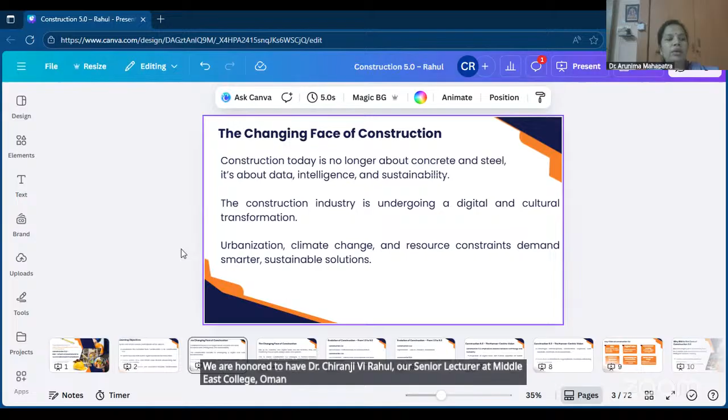We are honored to have Dr. Chiranjeevi Rahul, our senior lecturer at Middle East College, Oman, to speak on Construction 5.0, BIM driven innovation for a sustainable built environment. Sir, we warmly welcome you to the session. Before we start, I now invite our faculty colleague, Mrs. M. Himangeshwari, Assistant Professor, to formally introduce our eminent speaker to the audience. Over to you, ma'am.

Thank you, ma'am. Good evening, everyone. It gives me immense pleasure and pride to introduce our eminent guest and today's speaker, Dr. Chiranjeevi Rahul Rolakanti, distinguished academic and professional, my guru, mentor, and a true inspiration in the field of civil engineering. Dr. Rahul is serving as a senior lecturer in the Department of Civil and Mechanical Engineering at Middle East College, Muscat, Sultanate of Oman, since 2015.

He holds a PhD in civil engineering with master's degrees in construction technology and project management, and soil mechanics and foundation engineering. He also earned a postgraduate certificate in academic practice with distinction from Coventry University, UK. With over 13 years of rich academic experience and a year in the construction industry as a quantity surveyor, Dr. Rahul blends academic excellence with real world expertise. He is a chartered engineer recognized by the Institution of Engineers, a member of the Chartered Institute of Building, and a fellow of the Higher Education Academy, UK.

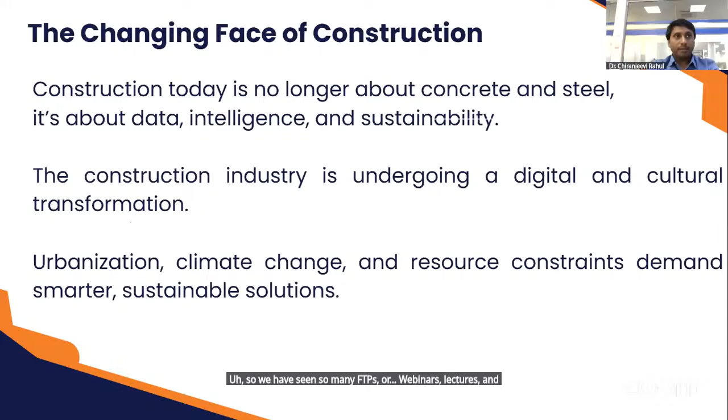We are all aware that the construction industry is undergoing a digital and cultural transformation. We have seen many FDPs, webinars, lectures, and construction people are more focused on urbanization, climate change, resource constraints, resource allocation, project management, and finding smarter and sustainable solutions. The changing face of construction continues such that the next era includes BIM, artificial intelligence, Internet of Things, robotics, and digital twins.

These are all no longer futuristic, they are already being implemented in various parts of the world. This integration of technology is redefining how we plan, design, build, and operate construction projects. That is why this topic is emerging, majorly focusing on human-centered technology, integrated as a model focusing on collaboration between humans and machines to achieve sustainability.

Here we look at the evolution of construction from 1.0 to 5.0. Construction 1.0 focused on manual labor and craftsmanship, with little mechanization. Construction 2.0 addressed what was lacking in 1.0, and mechanization began with heavy equipment and construction plants coming into practice. Construction 3.0 started industrialization, like prefabrication, mass construction, and integration of advanced construction methods and technologies. Maybe we were in that era.

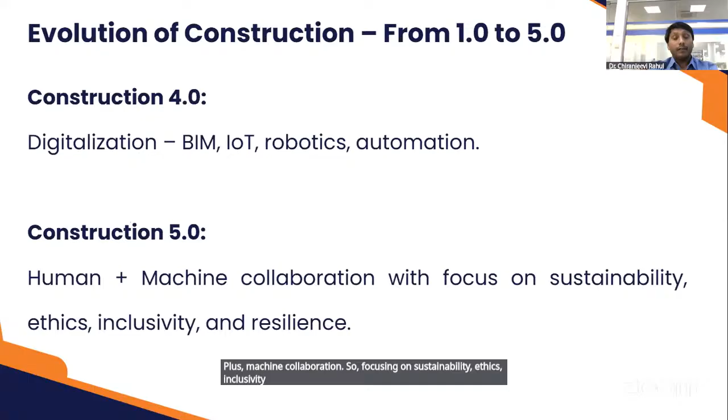Let us dig more into Construction 5.0. What is the human-centric vision and what does it emphasize? It's a balance between technology and humanity — technology should not overcome us, nor should we be negatively affected by it. It's integration between a human-centric approach, combining digital tools with human expertise for better outcomes. In simple terms, Construction 5.0 integrates digital tools with human-centric vision for better outcomes, with technology supporting and enforcing us to achieve better results.

This focuses on a sustainable, safe, and inclusive built environment, and majorly encourages interdisciplinary collaboration. Until now, civil engineers and architects were only collaborating, but now with BIM, software, IT people, and data scientists are all integrated. It's interdisciplinary collaboration where engineers, data scientists, architects, and environmentalists are included, because of the focus on sustainability.

This moves from automation to augmentation, with machines enhancing human decisions. Machines are not overcoming us — we cannot look at it that way.

So we can look in such a way that machines are enhancing our human decisions. Machines are supporting for better outcomes, giving some sustainable outcomes in construction projects. So I would like to say that these are the key pillars of construction 5.0.

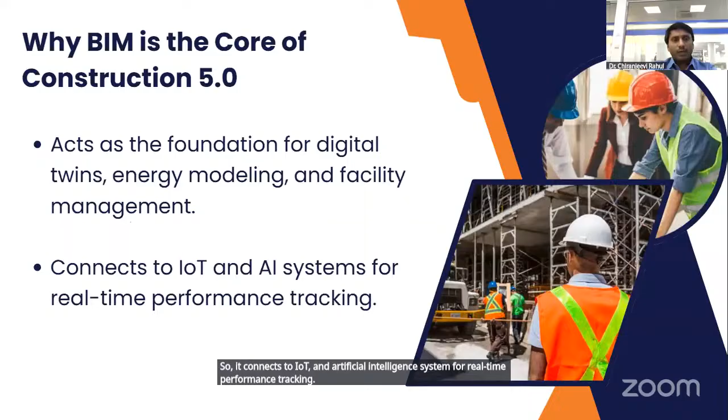It acts as a foundation for digital twins, which has energy modeling and facility management as well. It connects to IoT and artificial intelligence systems for real-time performance tracking. So this is why BIM is the core of construction.

So coming to BIM for sustainability, how it can go beyond design, how we can integrate BIM. First of all is material optimization. It's very important that optimization is the basic key of our project management techniques, where we need to properly plan, like we know all 5 M's: machines, machinery, materials, manpower, money, management.

All these 5 M's are all having the same goal of optimization. So it will help us for material optimization, which will identify low carbon materials or low carbon construction methods, using locally sourced materials, and it can also help us in life cycle assessment, like tracking embodied energy and carbon footprints.

And this is a major point of sustainability aspect as well. There are so many studies which mention that most of the waste coming from construction industry, in various forms, can be managed using virtual clash detection and lean scheduling. So before the project itself, most projects are having a visual idea of how it is going to happen, where it is going to happen, and they are also identifying risk management, or can also identify hazards.

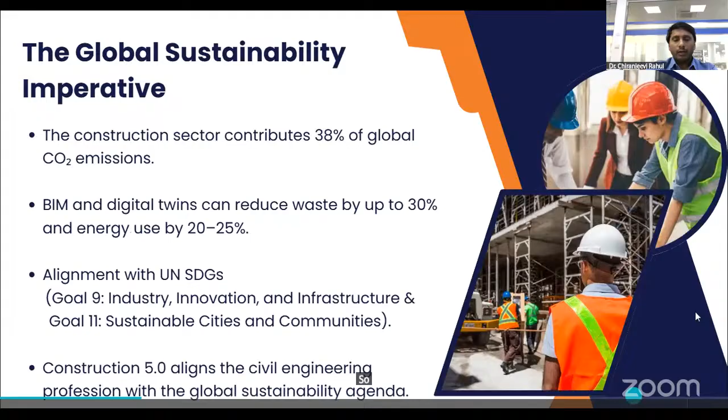So we are all working on the sustainability agenda. Even here in Oman, we have Oman Vision 2040. India also has Vision 2047. So all are focusing towards a sustainable approach.

This is a brief of what is Construction 5.0 and how BIM can be incorporated, and what are the advantages. Since this is a faculty development program, I'm not going to the basics like advantages, disadvantages, how it can be used. I would like to jump more into practical scenarios and explore some real-world BIM examples happening around the world with sustainable projects driven by Construction 5.0, including basics from principles to design to operations.

So here are some examples. I have gathered some projects. There might be so many, but I have taken 3 or 4 examples of global projects from UK, Singapore, and Australia. As I'm working here in Oman, I have also considered the GCC region - Saudi Arabia, UAE, and Qatar.

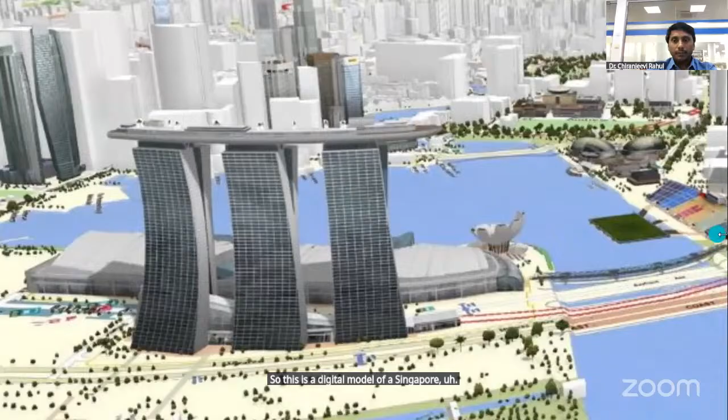So this is a digital twin model of Singapore. These are the models that they have created.

Coming to Sydney Metro, Australia - digital twin for operations. This project implemented BIM and IoT integration for real-time monitoring. These are all digitally linked to maintenance schedules through 7D BIM - this is 5D, 6D, and 7D facility management. We have gone through 7D BIM before, which is facility management. They are digitally linking all these maintenance schedules.

This helps track energy consumption and carbon performance as well. They have predictive analysis and forecasted maintenance needs, and have reduced downtime by 30%. This is a very major problem where clashes in schedules or issues in metro delay a lot of trains and transport, causing suffering for many people. So this has driven digital twins which make public transport infrastructure smarter and greener.

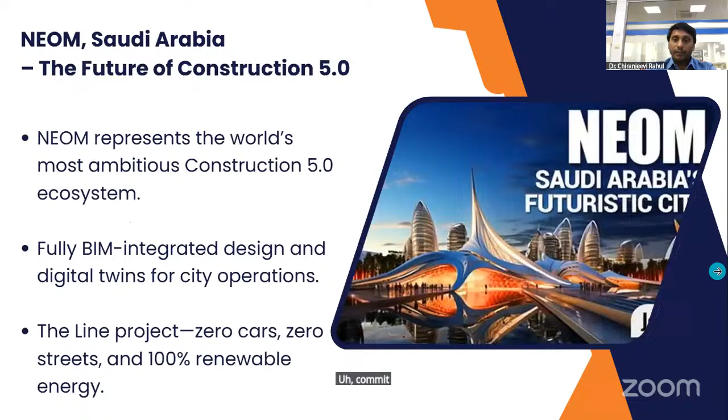They have developed this using all the technologies we were discussing. It's a fully BIM integrated design with digital twins for city operations - not only about designing, but from the basic design stages to operations and even maintenance. The Line project has zero cars, zero streets, and 100% renewable energy, which is why it's the future of construction. Achieving 100% renewable energy is an outstanding commitment for the future of construction in terms of sustainability.

They have incorporated AI, robotics, and modular construction, which helps reduce waste and human errors. You can see the focus on circular economy - this is one of the key points I mentioned. Materials are tracked for reuse using blockchain, which is why it became interdisciplinary. Blockchain comes into the picture, IT people come into the picture, data scientists come into the process - all enabling interdisciplinary actions.

So it defines construction 5.0, like technology and human coexisting sustainably. It's not only technology working, it's not only human - as we discussed, humans get support from technology, which enhances decisions. So this is a view of this NEOM project - NEOM into the future.

And the next example is Expo City Dubai. In the earlier days it was called Expo City, the Expo 2020 site, the place where it happened, but now it was transformed into Expo City Dubai, which is a sustainable smart city with a lot of scope for research. We can identify numerous technologies in this topic.

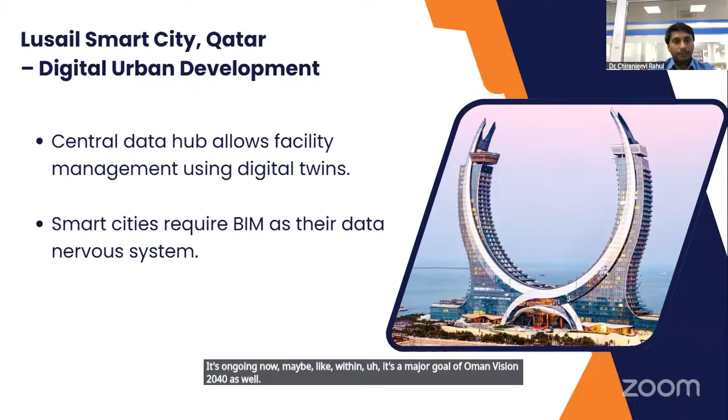This is what I was saying about the building designs, the building architecture. It's like one Corniche area, one special city, so Qatar looks different. When we see the normal city, it looks so authentic, like a typical GCC country area. But when you see this city, it's totally different - very smart, huge sky towers, skyscrapers, and different technologies. Every building has its unique architecture.

So what are the reflections? What are we going to take away from this? The first major thing is the vision-driven approach. Countries have a vision, governments have a vision, so they started linking it into national sustainability agendas, which has supported construction organizations to follow this approach.

The major problem here is that normal or private construction projects generally don't take the risk because this requires a lot of technology and skills, and we generally have what I can call starting trouble - we cannot directly implement something new. We require some time, we have to see some good examples. If some good examples have been set, then we try to follow them. So this lead should be taken from the national level, then it will slowly inculcate into construction projects.

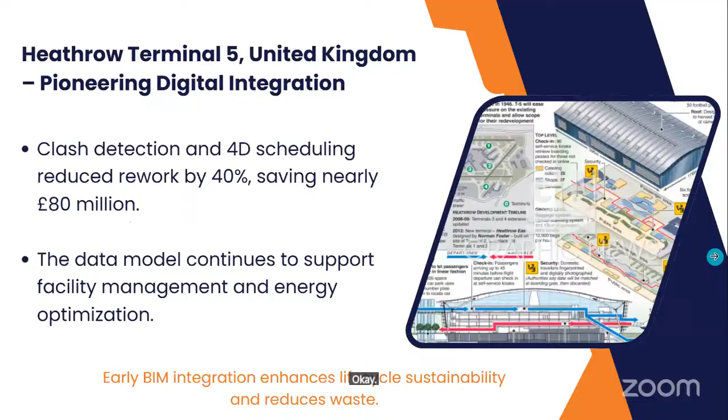So any other questions, please? I can also understand what is lagging and how I can take it further. I can focus on those points where you have queries, or you can share your experiences. Is there anyone who has already started working on BIM, or any industry people who have experience with BIM? Please share your experiences as well.

Rahul sir, we have the question and answer time at the end of the session. We can interact at that time, otherwise there is an interruption to your flow of explanation. Yes, sir, I understood, sir. Okay.

Coming to Indian case studies, how BIM enables sustainable development. One of the best examples is the Nagpur Metro Rail project, which is the first 5D BIM implementation - India's first fully 5D BIM managed metro project. They implemented 3D, which is mostly related to design, 4D related to time, and 5D related to cost. Previously we discussed 6D and 7D as well, which is facilities management.

This implementation of BIM reduced construction cost by 8% and time by 12%. This is the practical result of implementing BIM, which resulted in these savings, because a metro project might be a very huge project, and a cost reduction of 8% and time reduction of 12% is a very huge margin. Especially time, because we are facing so many issues with construction delays, and that can also be addressed.

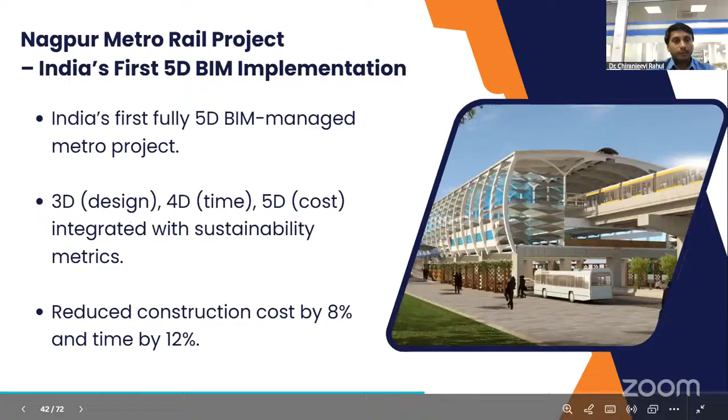The Nagpur Metro Rail project has BIM dashboards which help monitor material usage and CO2 emissions, enhancing transparency and sustainability in public infrastructure. These are the best examples of BIM implementation in India. This is a view of the 5D implementation in the Nagpur Metro Rail project.

So coming to this Amaravati Smart City, like I can see the disclaimer. Coming into the practical realities, we can talk about how they have started it and how they have designed it. So coming to this implementation of digital twin urban planning, the capital city project in Andhra Pradesh was planned entirely with BIM and GIS integration.

This has the advantage of simulating energy efficiency, and also the importance of water flow, conservation of water, and environmental comfort. So it has been designed as a zero carbon city, using BIM-led energy models. We might have heard the news that people from Singapore came and helped us design this project, because they are already ahead.

If you see the example of Singapore city, they started in 2015 itself. This BIM facilitates evidence-based decision making in urban planning. So this is one of the major parts, that urban planning has huge impact.

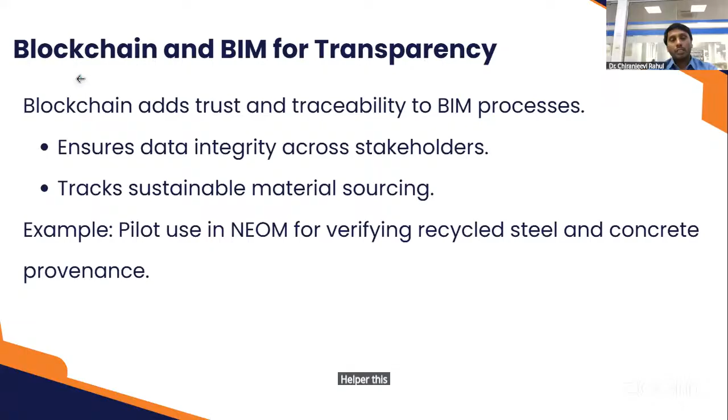As we discussed earlier, the pilot use of NEOM for verifying recycled steel and concrete provenance has helped this integration of blockchain and BIM for transparency. I have a flow chart, I'll show it later.

Integration of IoT with BIM. IoT is all about sensors, communication, signaling, or alerting, which monitors temperature, humidity, and occupancy. The sensors are directly connected to BIM, which enables dynamic energy adjustments.

Expo City Dubai uses 2,000 plus IoT devices linked to its BIM for real-time energy optimization. I have seen the Dubai Expo - not only for climatic or weathering actions, it has a lot of real-time energy optimization as well.

Coming to academia, research and industry integration - how we can incorporate this into our research.

So many of you might have already started doing research into it and gone through these different courses available. Faculty play a pivotal role in bridging digital theory and real world practice, because it starts from here.

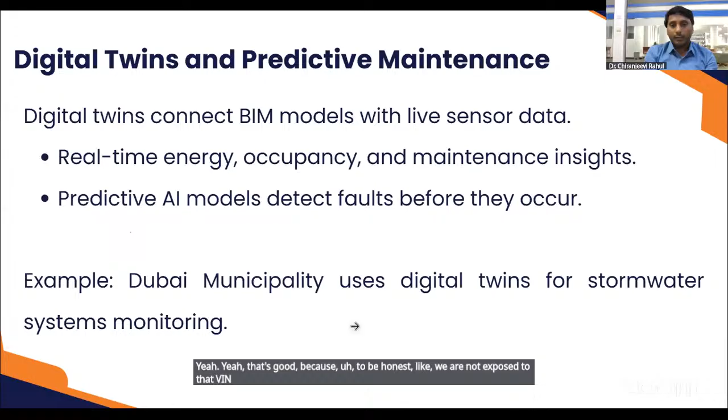In the previous two sessions, did you find any practical approaches or explanation, sir? Somewhat, even I have noted it down. That's good, because to be honest, we are not exposed to BIM integration since we are into academics, right? So I have not participated in any BIM integration.

But now the curriculum is based on implementing a BIM lab for graduate students, right? This is a nice takeaway for me as well, because next time I will go for an internship training for BIM integration, so I can come back with a practical example. As of now, I have no practical example where I have worked on it.

Even the session is too good, sir. Thank you so much for your genuine feedback. I really appreciate it, which helps me to grow as well. Thank you, sir.

Gautam sir, I have no idea about which private organizations, and I cannot mention them, because this is not the correct platform to recommend companies doing certificate courses. I don't want to take the credibility from them, sorry about that. When we are talking about a particular course, it should be approved by your colleges and all, I'm not sure about that.

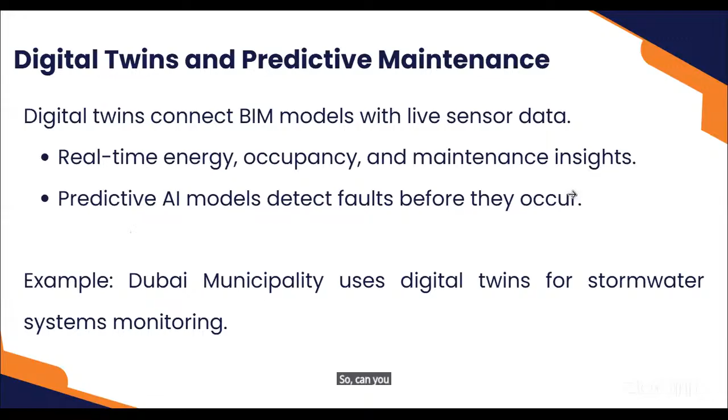Good evening, sir, yes sir. Sir, Giridhar here. Hi yes sir. Yes, Dr. Giridhar, yes. Thank you, sir. There are so many research scholars also here, so can you give any suggestions to them on global opportunities after completion of their research work, after being awarded? Exactly, so there are many opportunities now.

Like these are the research themes which you can see on the screen. I think I'm not sharing the screen, right? Sorry, it's already visible, okay fine. So you can see this digital twin development, especially you can consider heritage conservation.

We are all running behind the technology, concrete jungles, but one sensitive area is heritage conservation. Implementing these technologies without losing the heritage, especially in Oman, they are very much focused and concerned about their culture and heritage. Whatever development happens, it should not affect their culture and heritage. So countries especially focus on this, it's one of the important research areas. We're already working on construction waste reduction models, but how can you use artificial intelligence? BIM GIS might be a bit older version, so blockchain could be one of the interdisciplinary approaches to take. Maybe you can collaborate with a computer science faculty or management faculties, to see how they are incorporating them and how we can bring that into civil engineering.

Electronics engineering, electronics and communication engineering, and computer science engineering are our best peers where we can start working collaboratively. If you can publish some good papers, there is huge scope for research grants. Even we have the research council TRC in Oman, providing huge funds if you come up with construction 5.0, BIM, or artificial intelligence. So grants can be the next target, and even the government can also provide. International grants are also available for these things.

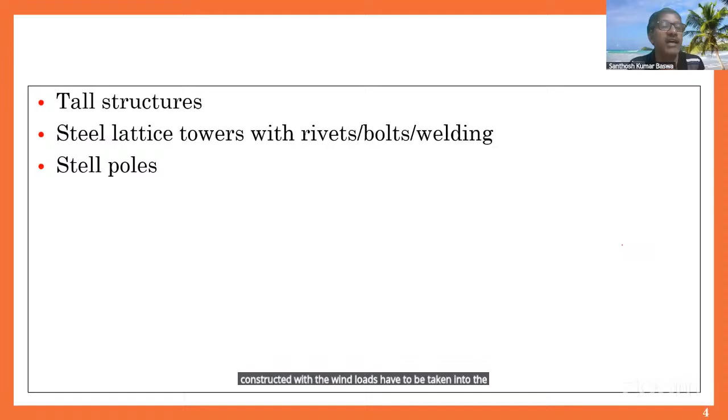So there are tall structures, and wind mainly has a resultant effect on tall structures - steel lattice structures with rivets, bolts, and welding, steel poles. These structures are constructed with wind loads taken into consideration. These are only flexible structures, not rigid structures. Even rigid structures, we take wind into consideration, but the inertia has a higher effect, so the wind effect is very, very less.

But for these tall structures, where there is the highest porosity or highest flexibility, these have to be considered for wind load on the structures. That is in the case of the working stress method, the limit state method, and the ultimate load method.

In France, that is the Eiffel Tower - the Eiffel Tower means cantilever action when compared to column action. The cantilever action is in the working stress method. We have shown that when the wind stress is greater, up to 33 and 1/3 percent, it is taken as wind structures, and it has to increase for wind structures.

In case you provide column structures - column is the vertical load, but wind is horizontal. When vertical load comes together with horizontal load from wind, both the wind load and vertical and horizontal load up to 33% - there is no necessity of any extra safety, but up to that we have to consider cantilever structures and column structures.

That is why in the previous working stress method we increased by 33% for wind loads and 25% for rivets. But in the limit state method, the philosophy already considers probabilistic design, so that was avoided. For column structures, G means gravity and W is the wind loads. Total wind loads plus gravity loads divided by gravity loads should be less than or equal to 1.33, that is 4/3.

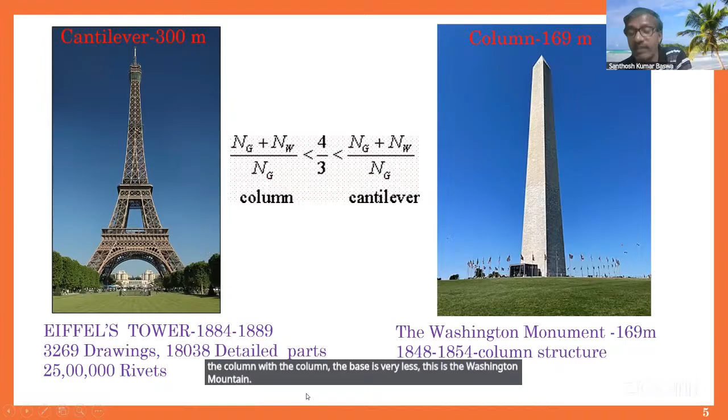This is column with column, the base is very less. This is the Washington Monument, 1848 to 1854, a column structure, 169 meters in height.

From 1960 to 2011, so many tall skyscrapers, from 634 meters to 329 meters, have been constructed. As research has gone on, different methodologies and materials have been used in construction, so recent research has been pronounced for wind engineering, adapted over the last decade or the last 50 years.

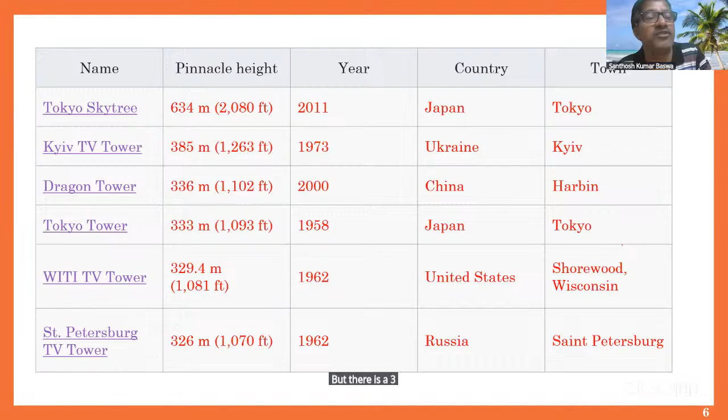So in history, there are many wind failures that have been observed, which we have taken from books and the internet. The first was in 1836, the Brighton Chain Pier Bridge failure, the first engineering failure observed in history, and similarly the Tay Bridge failure was shown as a wind failure. These are wind failures in ancient history, even in 1836 and 1879.

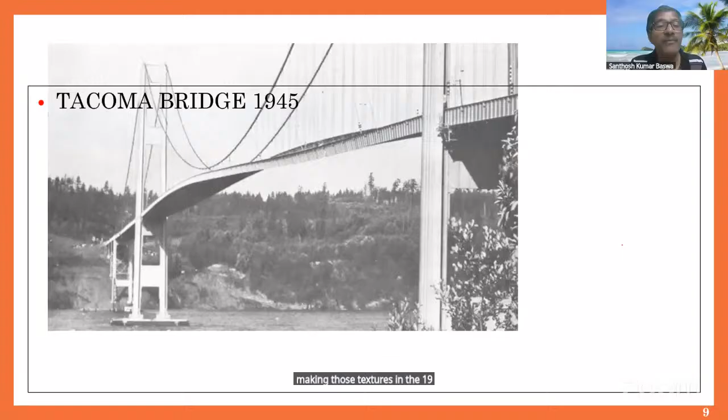This is the famous Tacoma Bridge. This is fluttering, 1945, one example of fluttering. This is the wake of the wind, and it collapsed due to the waking of the structure in 1945. So this is the interference effect.

Interference effect means the interference effect, and these are silos and thermal engineering structures. These large structures collapsed due to the interference effect, from the front end to the rear end, creating the highest wake. Wakes form, and these collapsed due to the resonance effect and the interference effect. That is why, in 1965, these collapsed.

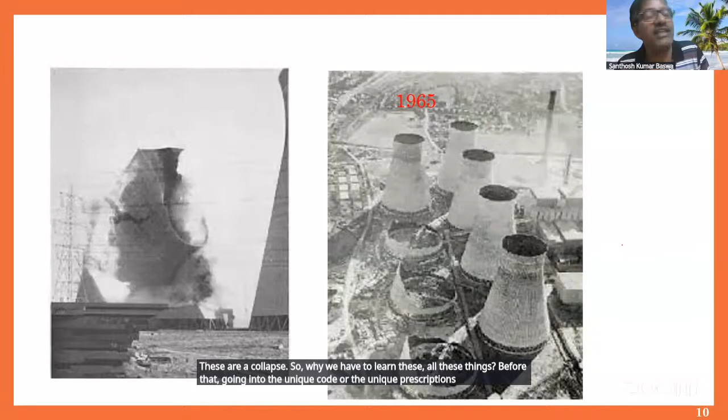So why do we have to learn all these things before going into the wind code or any prescription? Just as a doctor asks you what your problem is and why you have come, before going into our 875 code we have to look at past failures. Thus past failures inform future sustainability.

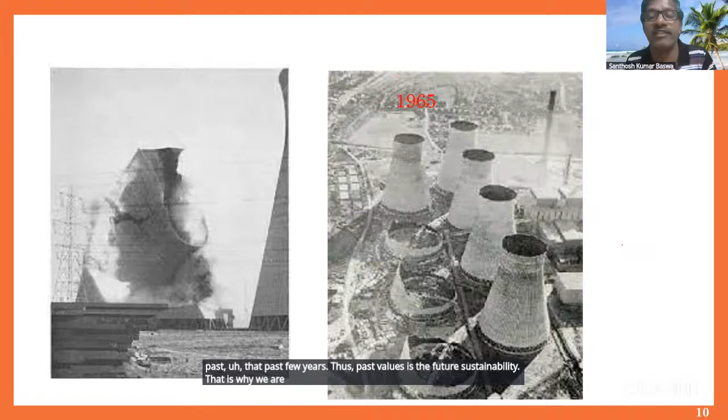That is why we are putting all these things into this lecture.

In India, the broad design aspects are of two types: force-based design and displacement-based design. Wind load is force-based design. Dead load, live load, snow load, and blast loads are also force-based, but earthquake load is displacement-based. This is inertia, and earthquake load acts at the bottom, the foundation of the structure, while wind load acts on the total structure from base to top. The design philosophy is different from one to another. That is why we are taking wind load as the force-based design.

The atmospheric boundary layer means the atmosphere up to which thermal equilibrium has to be taken into consideration, the height up to where wind force is taken into consideration. In this atmospheric boundary layer, there are variations of wind: mean wind forces, waves, and turbulences.

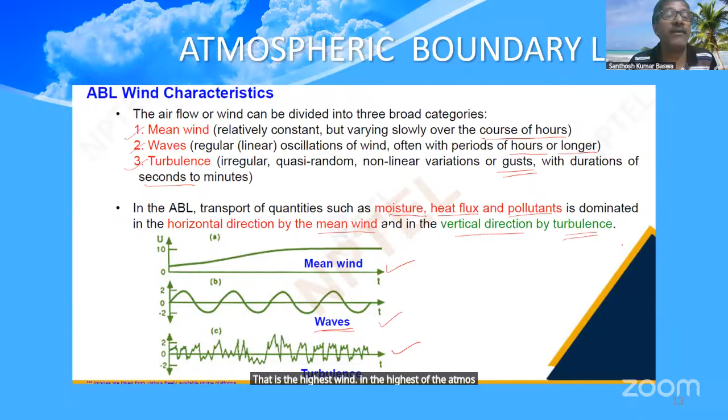The wind has to be measured with an anemometer, specifically a cup anemometer, which rotates and gives a rotating pulse reading. This anemometer measures from 1 hour to 1 hour, and also 3 hours to 3 hours. These readings show peaks, including single peaks of only 1 second.

Wind has been defined from local height up to 10 to 30 meters above ground level. Up to 10 meters, for a 3-storied building, there is no necessity of taking wind force into consideration as per IS 875 Part 3 code.

This shows the average wind speed taking into account the Beaufort code, representing time variations with respect to velocity. These variations occur because when designing structures, especially tall structures, many factors and probabilities must be taken into consideration. That is why time, velocity, frequency, and average velocity must all be considered in structural design.

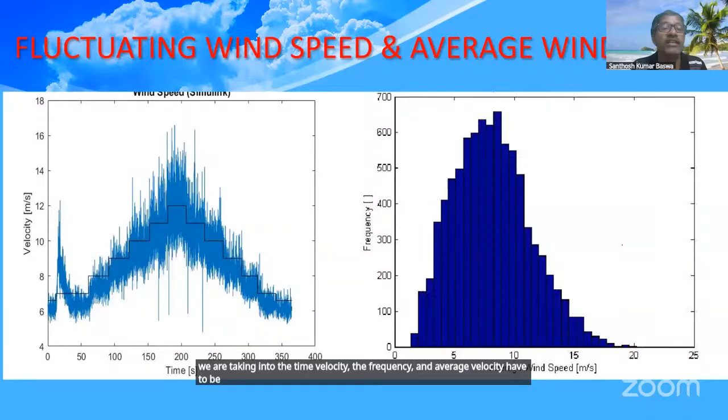At the same time, there is the velocity factor of the free stream boundary layer, from the ground level up to where maximum velocity reaches the free stream of wind, the boundary layer. The horizontal component of wind is what is taken into consideration for wind force. Although wind can move in vertical or horizontal directions, only the horizontal direction is considered for our structures.

Before that, there are two types of atmospheric activity in India. One is the rotating wind, the second is the non-rotating wind. Rotating ones we have already seen in the cyclones. These are the cyclones where there are the highest pressure variations. We are taking into consideration the rotation types.

In the non-rotating winds, these are small and calm, at neutral equilibrium of the atmosphere. The atmospheric boundary layer can be inversion, dynamic inversion, or neutral. We are taking the neutral atmospheric boundary layer. Because it's neutral, we are not considering thermal effects, only the mechanical consideration, the force and effects.

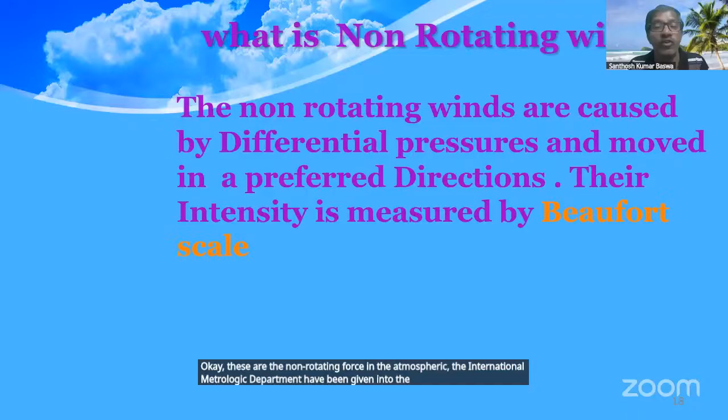Differential pressure there - these are the non-rotating forces in the atmosphere. The International Meteorological Department has given some consideration to the Beaufort scale. What is the Beaufort scale? Calm is 2 kmph, 2 kilometers per hour.

The hurricane is 117 kilometers per hour. Moderate gales are 50 to 61 kilometers per hour, causing inconvenience when walking, and strong gales are 75 to 85, and 89 to 102 kilometers per hour, with small trees uprooted. This is the Beaufort scale, internationally adopted for non-rotating wind speeds.

When there are rotating wind speeds, like on the east coast region and west coast region, or in America, Australia, the Indian Ocean, the Bay of Bengal, or Arabian Sea, or the Atlantic, or Pacific, whatever it may be, there are tropical cyclones near the equator, extending up to 20 to 30 degrees latitude where we face tropical cyclones.

This type of cyclone has been devastating, causing so much financial loss to the government over the last decades, and in history also we have faced so much economic disaster. But the deaths are considerably reduced when compared to economic losses. Economic losses have also gradually reduced because of the advancement of wind engineering.

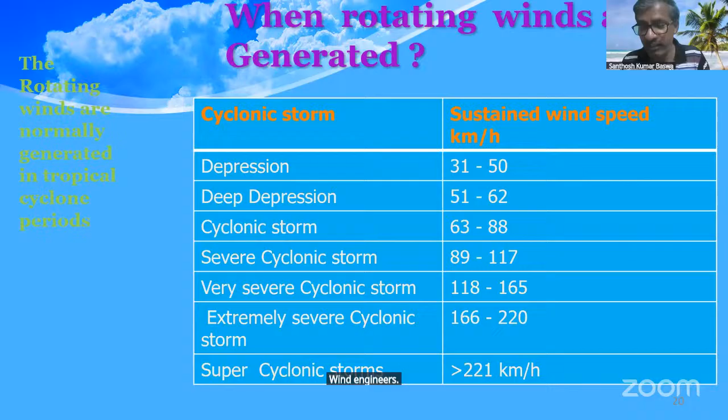So what is the spectrum? Spectrum is a unique combination of so many frequencies. That is the wind spectrum. Wind spectrum means wind frequencies. So many wind frequencies have been provided on one logarithmic scale.

Even when studying soil mechanics or structural engineering, we provide a semi-log graph, for calculations and classification of soils from clay and silt to boulders and other things - these are 40mm to 0.2-2mm. These various large variations are provided into one diagram, which is why we use the logarithmic diagram.

What is the spectral gap? Spectral gap means there are no variations within the 1 hour period. So we don't take into consideration weathering, but we consider the wind for our mechanical purpose only.

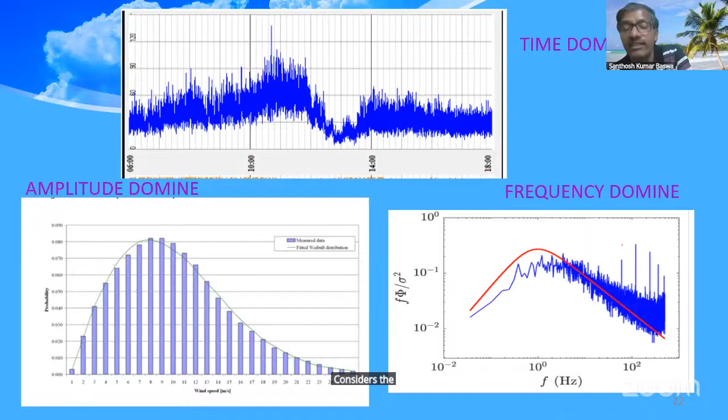So the U(z,t). Z is the difference of the height of the structure or the height under consideration. T is the variations of time. U(z) is the mean wind speed, and U'(z,t) is the turbulence, that is the fluctuation wind speed. Both fluctuation wind speed and mean wind speed are considered as the total horizontal wind speed for design of all structures, tall or even small structures beyond 10 meters.

So what is the bluff body? There are two types. When we study in the theory of elasticity - plates, shells, bodies and other theorems - the bluff body is any body having three-dimensional shape. The plate is any body which has two dimensions less thickness, but our structures are bluff bodies. Thickness means three dimensionals, that is X, Y, Z.

The wind has direction - wind is passing from one area to another, or the wind is stucking on any portion of the body. The wind pressure acts normal to the surface. When it acts towards the surface, it is the positive surface. When it is the negative surface, the wakes have formed on the other side - that is taken as the negative surface. But due to these bluff bodies and the viscosity of the body, the pressure distribution is not uniform.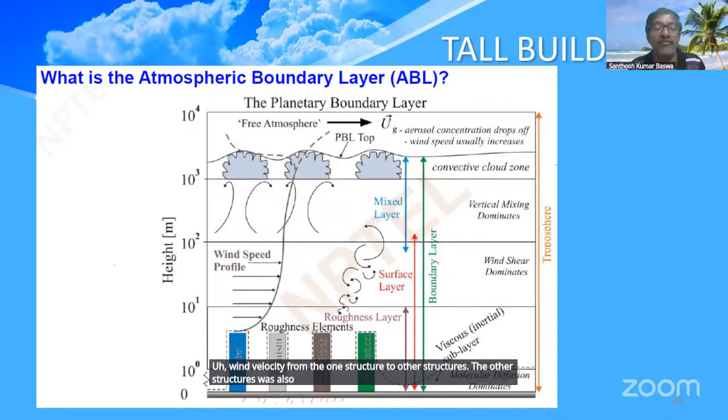So bluff body means that is the body where there is the three-dimensional effect, mainly at the edges. The edges are the sharp corners where the stagnation point is.

The stagnation wind pressure has been transferred, and the separation has occurred due to the stagnation of the wind pressure because of the velocity, the kinematic velocity, and the transfer to the stagnation point where the highest wind pressure, the kinetic V square by 2G, has been converted into the pressure head. The pressure head has gone into the stagnation.

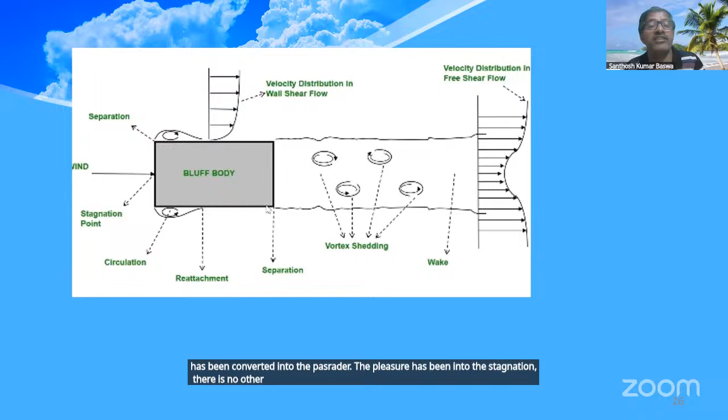There is no other direction to flow, that is why the direction of the flow was transferred to other directions. Where there is the highest direction, vacuum was created. The vacuum is transferred to the separation of the wind layer, that is the boundary layer.

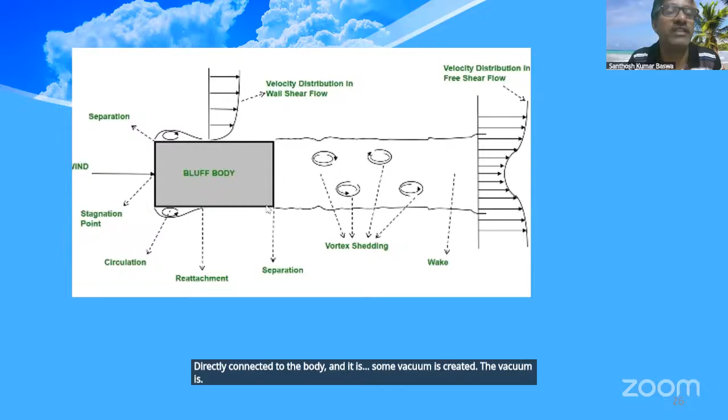Wind from the edges, because of the sharp edges, the wind was not directly connected to the body, and some vacuum is created. The vacuum is considered as the wakes. The wakes is negative energy.

The negative energy means that is a suction. The suction means the body was pulling to that side only, because of this is the shear layers.

Because we are taking into the mechanical effects, there is no thermal effects. We are taking the fluids as having only shear forces. Like in soil mechanics, we consider shear forces, and in fluids also we are taking into consideration of the shear forces.

So before that, going into the Indian context, in 1957 the whole code was provided for dead load, live load, wind load, and earthquake loads. In 56-57 is the first IS 875 code. In the first revision, 1964, earthquake code was deleted, and only dead load, live load, and wind load, these three, were considered by 1964.

In 1987, these were divided into part 1, part 3, part 4, part 5, into the parts, and the part 3 is the wind loads.

In the recent revision, 2015, the wind load has had some changes taken, and in 2016 and 2024 some basic wind speeds have already been changed from the 2015 version to the amendment version with the adoption of the National Building Code 2016.

In the structural design of the National Building Code, the basic wind speed map was already revised. The revised wind map was considered in the IS 875 Part 3 for wind loads for structural engineers.

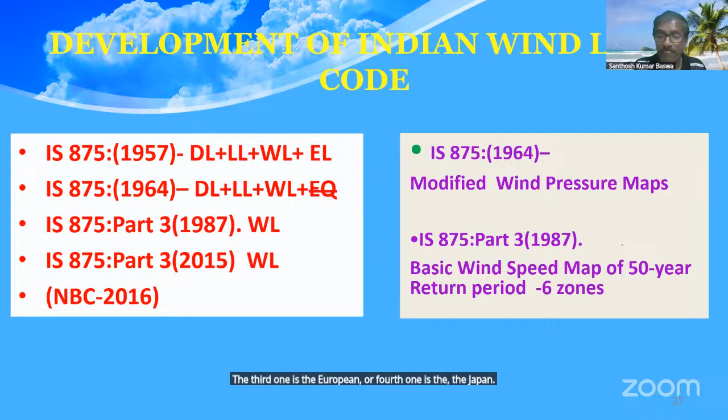So the title is the design loads other than the earthquake loads for building structures. This is the title of the wind code.

The title has been changed from 1964 to 2015, the 875 2015, or 1987, design loads. These are the design loads given for the minimum prescriptive loads to be adopted for the design of any structure. These are the minimum loads, but you have to provide more loads; these are the minimum consideration loads for designing any structure.

So when we are taking into consideration the wind loads of structures, there are two types of design methodologies. One is the static analysis, the second one is the dynamic analysis. Static analysis means up to low-rise buildings, we take into consideration the static analysis.

The static analysis is for roof structures, steel structures, and up to only small low-rise buildings up to 10 meters height or 15 meters height, we take into consideration the static analysis.

The dynamic analysis means we have to take into consideration the gust factor analysis because of the random response. In the code, in this analysis, we are taking into consideration two types.

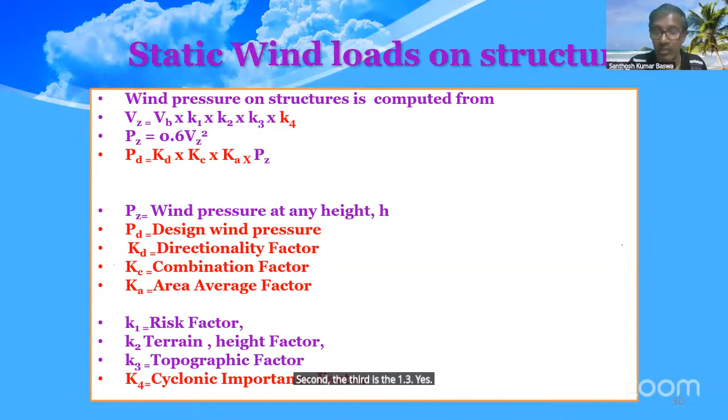Before that, there are 6 wind zones considered for basic wind speeds ranging from 33 to 55 meters per second. We are in zone 5 with 50 meters per second in the east coastal region, the second is 33 meters per second, and the highest is 55 meters per second corresponding to 198 kmph, which is in the Kashmir zone and Arunachal Pradesh zone.

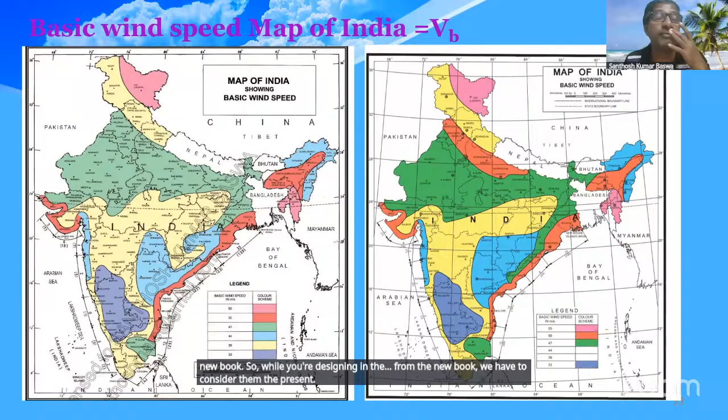So when designing from the new book, we have to consider the present design wind speed, not the previous wind speed. So this is from Lucknow, UP, and this is Delhi. Delhi 4th to 5th, that is 47 to 50. These are all 47 made. Existing basic wind speed is 47, and the revised basic wind speed is considered as 50 wind speed.

Because of Delhi, Punjab, UP, Chandigarh, Manipur, Jharkhand, Madhya Pradesh, Uttarakhand - they are all north states. North states have been changed from 47 to 50, and even some stations have been reduced from 47 to 39, that is Jharkhand, MP, Uttarakhand. Because of the availability of data, IS 875 has been reduced from 47 to 39. But if it is reduced, there is no problem.

But if it is increased, there is a problem of two types. One is existing structures, the second is new structures. First of all, we have to check the stability of the existing structure from 47 to 50 meters per second in Delhi or Lucknow. And in case of future structures, we have to adopt 50 meters per second as the basic wind speed. That is why we have to take it into the new code.

So earlier, the classification of structures, K1 is the risk factor, meaning the probability of non-exceedance of the given wind speed. The design wind speed is generally taken as 50 years. And at the same time, the general structure's design life is 50. It is taken 50 by 50 equal to 1.0. In case of 5 year temporary sheds or boundary walls, they are taken as 0.67, that is the 5 years of design life period.

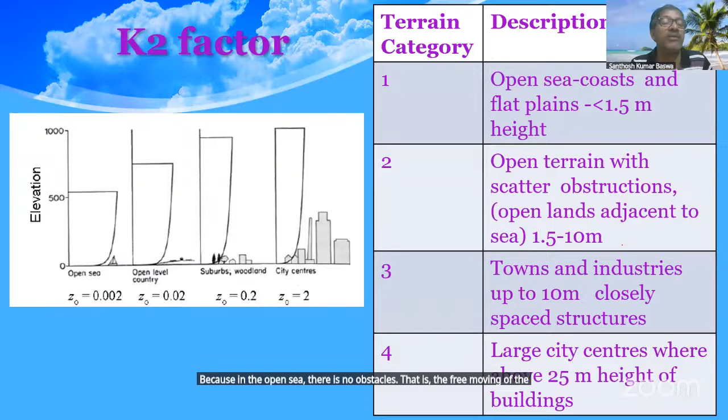It is terrain category 4. That is why the gradient height is very high, about 1000 meters. In case of open sea, the highest variation is at 500 meters, because in the open sea there are no obstacles, so the air moves freely. So this is the reverse of the diagram.

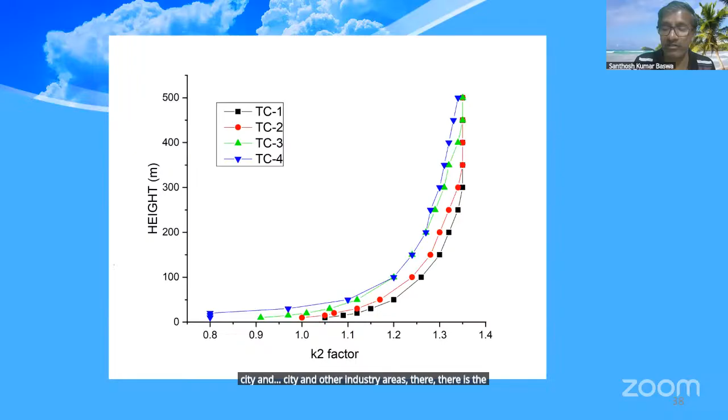1 is the lowest of the highest variations. For TC 1, the black line shows the highest variations, while 4 is the lowest. This is because the gradient height is low for open sea, but very high for category 4, in cities and industrial areas, where the highest buildings are considered. This is the variation of terrain 1, 2, 3, 4.

This is the table showing how the variation is 1.05 to 1.35. Even though it's only 5% or 35%, the internal forces change by a much higher percentage. These are the input parameters, while the output parameters are the bending moments, torsional moments, shear forces and other things. There are the highest variations because even a 2% change affects the stability of the structures.

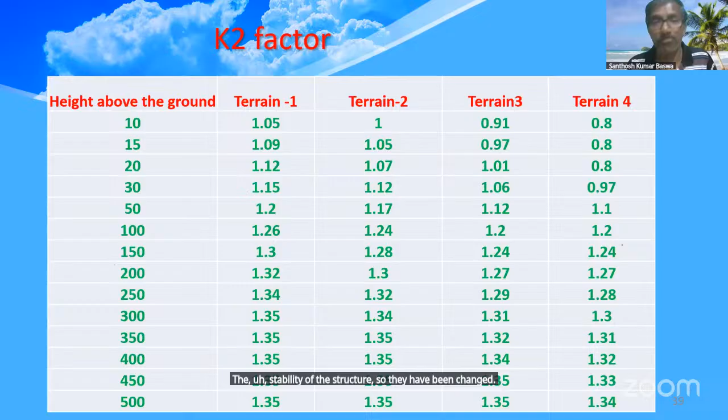So we are already taking up to 3 degrees. There is a hill, and before the hill or at the top of the hill, there are variations. It varies much because of the stagnation points. This is the stagnation point, otherwise there is the highest change of velocity.

Why are we considering K3, not for buildings, but for transmission lines? Kindly see, this is for transmission lines. This is K4, K3, the topography factor, which is highly influenced because on the highest land and the lowest land, the forces are different; one is highest, the other is lowest. The highest one creates uplift pressure.

The total structure was uplifted and collapsed, while the structure on the lowest point remained simply stable. That is why we consider the K3 factor for usage in transmission lines.

So this is recently adopted, and it will be considered only for the sake of Andhra Pradesh. There have been so many cyclones hitting Andhra Pradesh from 1960 to 2014, even in 2025, including the Montha cyclone. But we are not considering the cyclone economic effects. Every year we face one, two or three cyclones, since we are in the east coastal region.

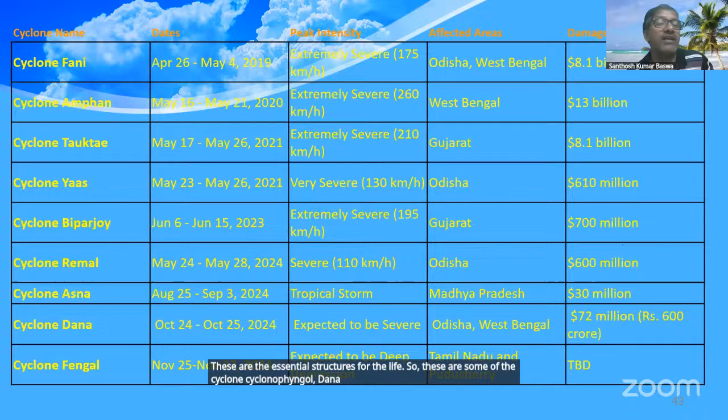So these are some of the cyclones - Fani, Fengal, Dana, Remal, Biparjoy, Amphan. These caused so much damage due to the cyclones. 8.1 billion to 72 million to 30 million - these are in Orissa, Gujarat, West Bengal, Tamil Nadu, Puducherry, and Andhra Pradesh. That is why the cyclonic factors have been recently considered from the 2015 code.

This damage in the affected areas - even in Andhra Pradesh, it is some places in the Krishna and Godavari districts, and in Orissa, mid-Orissa, and Calcutta. The third one is Madras. Madras state, and other neighboring districts, was damaged every year.

So in the case of design, the design philosophy has been given in the IS 875 code. Simply, the design considers the building as a whole. Second is individual elements, that is roofs or walls - because of industrial roofs, these are gable roofs, A-type roofs, or lean-to roofs. The third one is cladding units including glazing and fixtures.

Fixtures have the highest localized pressurized areas, that is why we consider fixtures as the highest. When considering roofs or cladding, we take the basic CPE and CPI, that is the pressure coefficient. But in the case of fixtures, the localized pressure coefficient is considered for the fixtures.

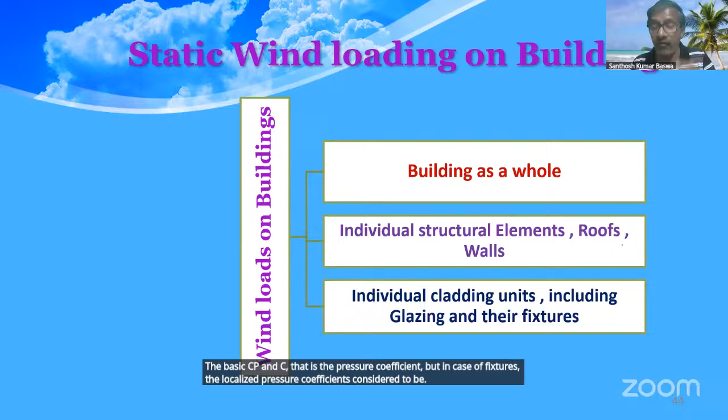This applies only to inclined roofs, that is A-type roofs, lean-to roofs, or single type roofs or mono slopes. For these roofs, CPE minus CPI means the external wind pressure based on the geometry of the structure.

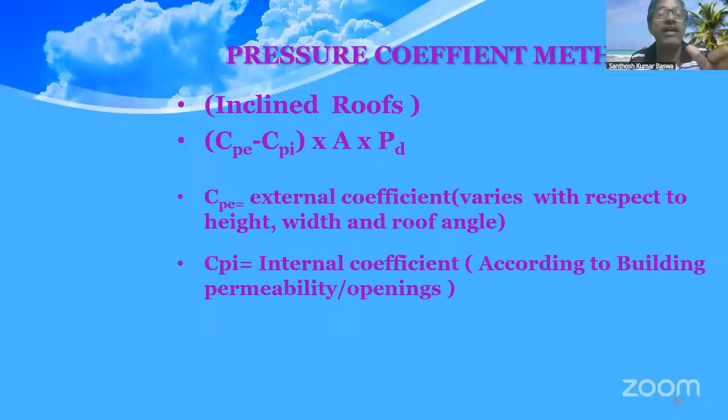CPI means internal pressure based on the permeability or opening of the structure. Opening means the total area enclosed into the walls or facades. The amount of opening means the amount of doors, fixtures, windows - these are considered for determining the difference between external and internal coefficients, so that we know how much force acts on the structure.

So this is the A-type roof truss. How does the incidental wind profile work - the left side shows the wind profile, how wind acts on the structures. The first point is the stagnation point, the second is the separation point, then reattachment, and wakes are formed on the leeward side. This is the frontward side, this is the windward side, this is the leeward side, that is the reattachment - how the separations are taken into consideration.

These are the uplift pressures or internal suctional pressures. The pressure acts towards the top, that is why we take into consideration these CPI internal suction forces towards the top.

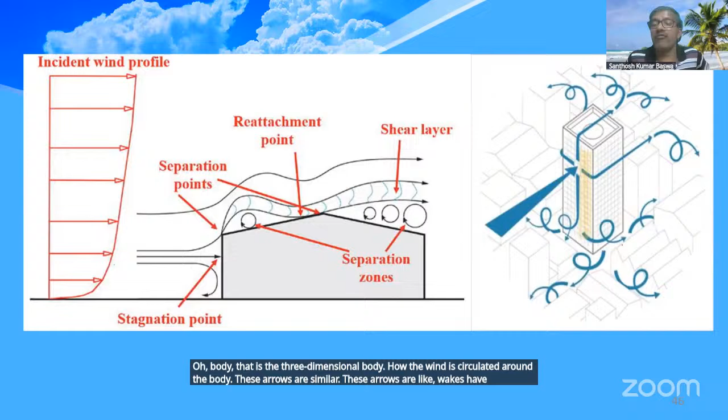The right side diagram shows how wind acts on a three-dimensional body - how the wind circulates around the body. These arrows are similar, like wakes. Wakes have been formed due to the stagnation point, turning toward the top, sides, and bottom. Because of these circulations, nearby structures are also influenced by wind forces on tall structures.

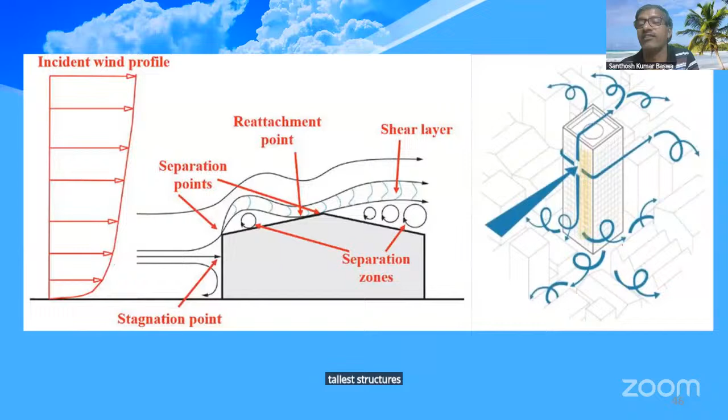If two structures are of equal height, there is no problem. But if one structure is tall and the other is somewhat smaller in comparison, the small structure also experiences effects from the tallest structure. These are the wakes and other interference effects - wind effects have been dominated for the structure behind as well.

This is why our question is, even when wind is acting from the left side to the right side, this is the pressure action, which has been transferred to the right. But as per model studies and wind tunnel studies, even though pressure is acting, the suction is more dominant compared to the pressure action.

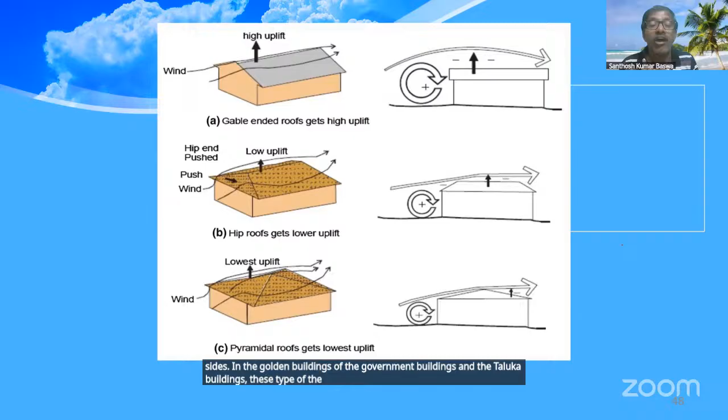This is both sides, that is the four sides, the slopes are formed on four sides. In the olden buildings of government buildings and taluka buildings, these types of pyramidal roofs have occurred in the older construction.

But in our present scenario, we have flat roofs and flat slabs. There is no problem of wind loads up to 3 meters for 3-story buildings. But in case of villages or isolated places, we provide this type of four unit slopes on all sides towards the ridges, pyramidal slopes, so that we have less wind damage compared to the other two types of roofs.

So this is the left side where the wind has occurred. This is why there is positive wind pressure on the windward wall, and this is the suction pressure. These are the internal positive pressures acting along with external forces.

These are the suctions showing how the internal wind pressure has been transferred to the highest wind pressure. Even though these arrows point towards the roof end, the outer side is also giving suction. That is why we get the highest wind force, which is on the eastward side, the highest wind force compared to the other ridges or other sides.

In this area, the height of the building, height by 2, height by width - the height of the building by width of the building is considered from three criteria.

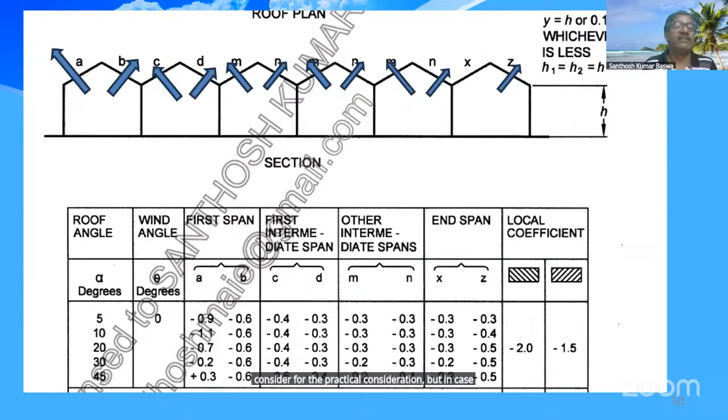In case of A and B, these show the highest variations at the starting position. The remaining are constant. At Z, it's somewhat higher than the inner one because there is no other structure on the right side of the structure. These are the code provisions.

So this is the wind. This shows the variations of wind pressure when the wind acts from left to right. In left to right, the variations of wind pressure are shown in this direction. In all three directions, the wind pressure is transferred.

That is why we take the wind load from height Z in any direction - the leeward direction, sideward direction, or windward direction - with reference to wind tunnel testing.

The CP pressure, external wind pressures, have been taken as negative values only. Kindly see it - these are all suction forces, and reattachment was not taken into account for the forces.

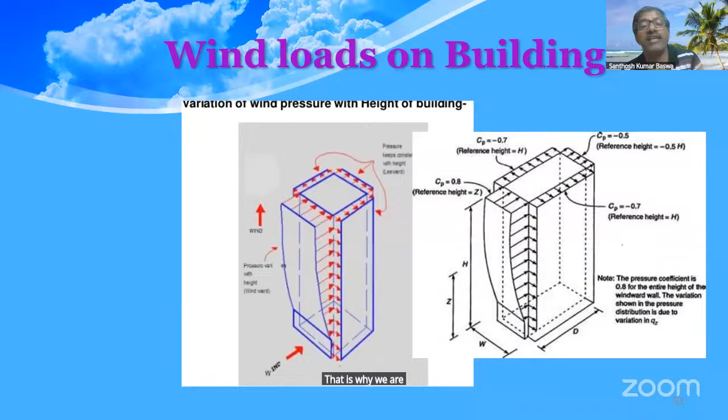That is why we take constants of 0.7, 0.5 and 0.7. The sides are 0.7, the rear side is 0.5. These are suction forces, which is why we consider oscillations from the windward side to the leeward side.

In case of individual frames or members of buildings, walls, hoardings, or anything similar, we only consider the force coefficient, CF, which is also a type of force coefficient.

Previously, CPE minus CPI represented the external coefficient minus the internal coefficient due to permeability. But individual members have no such permeability.

For these structures we consider force coefficients, generally used for buildings or walls. The third category is hoardings.

In case of walls or hoardings, the CD, the drag coefficient, depends on the height of the structure and the width of the structure. The width-to-height ratio may be 1.5, 5, 10, or infinity, giving variations of CD from about 1.1 to 1.6.

In industrial areas and cities, hoardings or signboards are prominently used for displaying advertisements. The correct methodology for this has not been specified in the code, but the design considerations aim to avoid undue variations in wind loads.

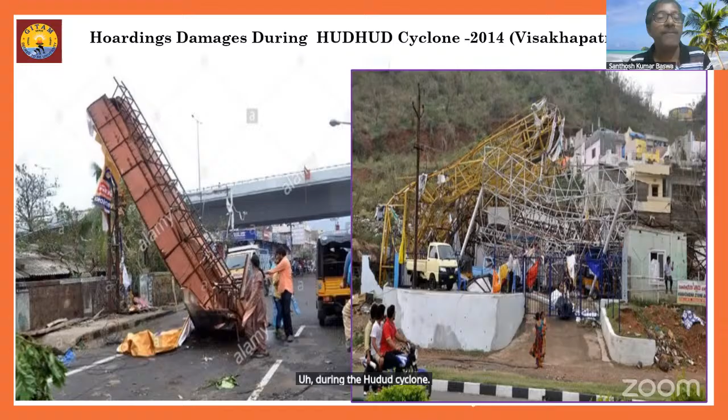This shows hoarding damages during Cyclone Hudhud in 2014. This is Visakhapatnam, and these are also from Visakhapatnam, showing hoarding damages during the Hudhud cyclone, including hoardings and display boards.

For water tanks, petroleum tanks, hoardings, and boundary walls - for water tanks we take a factor of 1.3. The code has not specified water tanks or petroleum tanks, but their hazard is very high compared to normal structures, which is why we take 1.3 for water tanks and petroleum tanks.

In case of hoardings, the design is not specified in the code, but because of the high damage caused in city areas leading to human loss or economic losses, these should be considered as industrial structures or post-cyclonic important structures - we consider them as post-cyclonic structures.

In case of boundary walls less than 3 meters, we do not take into consideration the 5 year return period.

This is considered as the 50 years design life. In case of boundary walls or retaining walls more than 3 meters, these retaining walls should be considered as post-cyclonic important structures.

There is also a factor of 1.3 for the cyclonic impact, considered to represent the loss of human life and structural safety. This cyclonic factor was introduced in IS 875 Part 3, 2015.

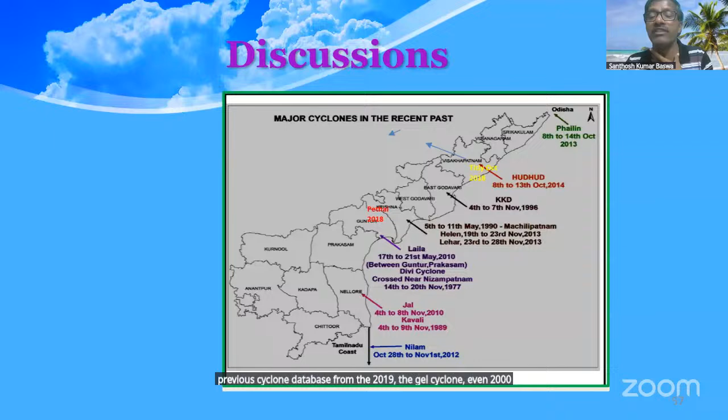This shows 1 in 3, 1 in 4, and 1 in 5, the three types of roof slopes. Standard slopes were considered in the design of steel structures, that is 10 degrees to 11 degrees. That is why we take 20 degrees, and above 20 degrees up to 30 degrees.

There is some positive pressure, but we are not considering the positive pressure, only the suction pressure.

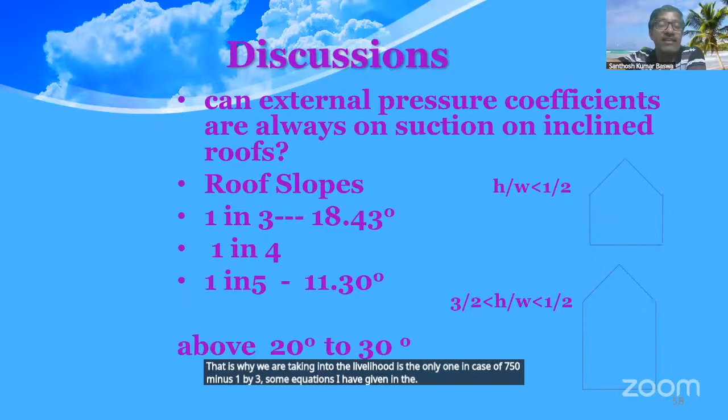So in case of the gust factor method, up to this level we are talking about only the static method of design consideration. In case of the gust factor method, it depends on the height of the structure.

The code has given low-rise buildings as less than 20 meters, and 20 meters to 50 meters, with greater than 50 meters being high-rise buildings. So 20 to 50 meters would be medium-level buildings, but this medium-level category was not specified in IS 875, only above 50 meters as high-rise buildings.

These are not only buildings but also telecommunication towers, transmission line towers, steel monopole towers, or street light towers - any tower greater than 10 meters is considered a high-rise structure. Oscillations of these structures have been predominantly considered in their design.

So this is about wind direction. When wind acts on any body, there are three types of forces: one is along-wind, another is crosswind, and the third is torsion. The crosswind and along-wind are in the same plane.

The along-wind is the drag force, the crosswind is the lift force. The lift and drag forces are in the same plane, not like in the case of aerofoils, where the drag force is horizontal and the lift force is vertical.

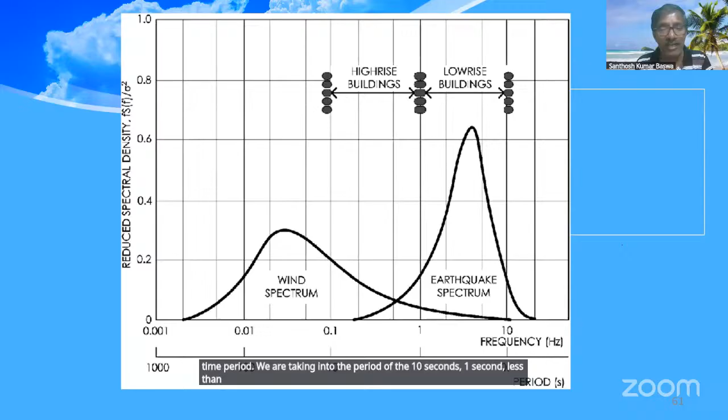This shows the variation of reduced spectral density for both wind spectrum and earthquake spectrum. The earthquake spectrum is in terms of frequency, the wind spectrum is in terms of time period. We take a period of 10 seconds, 1 second, less than 1 second - wind oscillation is considered from 3 seconds.

What do we take as the basic wind speed? This is the average wind speed over a 3 second period. But in case of earthquake, it is 0.6 seconds, or 0.1 second, corresponding to 1 hertz, 5 hertz, 6 hertz, or 10 hertz. There is a response spectrum factor given at 0.1, 0.2, or 0.6 seconds.

That corresponds to the highest frequencies. Earthquake frequency is the highest, while wind frequency is comparatively low. That is why we take into account the time period in seconds for wind.

The earthquake is in the hertz. That is the basic difference between the earthquake spectrum and the wind spectrum.

In case of the gust factor method, there is a height greater than 50 meters. There are variations of height, variations in the consideration of Z, variations of the level at which we consider forces and moments.

The second is frequency variations, which are the gustiness variations - the highest variations of the spectrum with reference to the resonance factor of the natural frequency of the building and the frequency of the wind. Both are considered for calculating the gust factor G value.

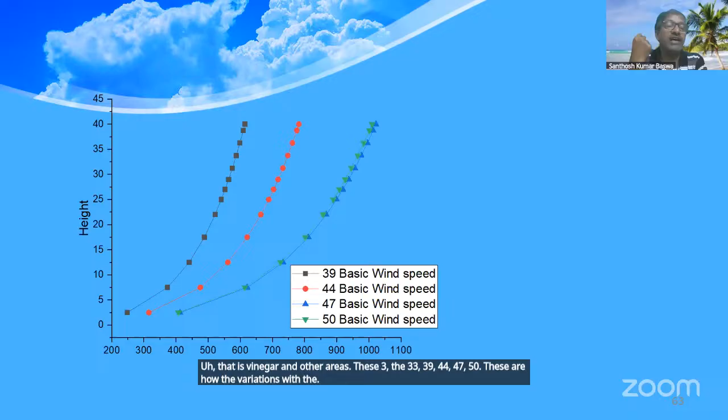These are the three values: 33, 39, 44, 47, 50 - showing how variations occur with height. This is in Newton per meter square.

The horizontal axis is Newton per meter square, and the height axis is the height of the structure, up to 40 or 45 meters. This shows how the variation occurs.

This is a logarithmic variation, based on log, compared to power variation. The power and log variations are similar, but logarithmic variation has a theoretical basis, while power variation is empirical.

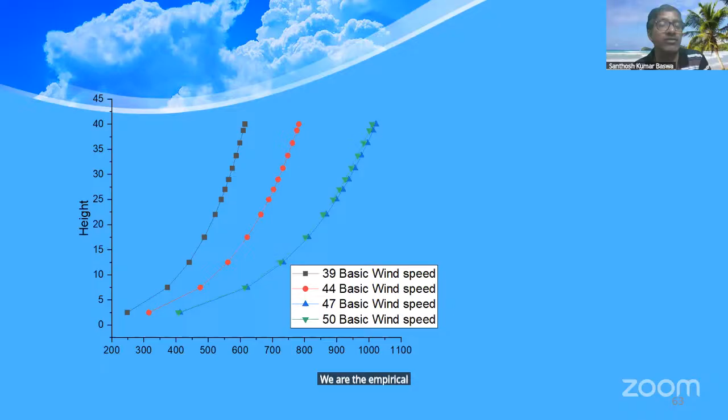This is the same for all basic wind speeds from 39 to 50. Recently, it was changed from logarithmic variation from one zone to another. This is under draft and not yet directly implemented - the new amendment code will be published within 1 or 2 years.

So this is the gustiness variation. What is the gustiness variation? This is from one of the PhD studies, comparing 1980 to 1987 and to 2015.

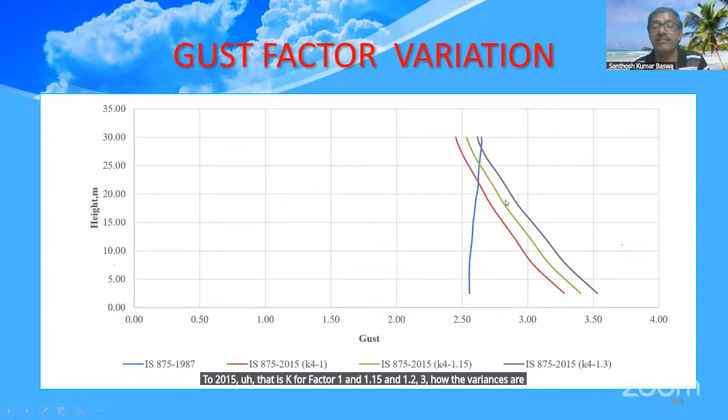The K4 factor values are 1, 1.15, and 1.3. In 2015, the K variation is from 2.5 to 3. In other cases, these values increased from 2.5 to 3.5, from a height of 30 meters to 5 meters.

This is done step by step. It is not considered as simply lowering or raising, but as a variation with respect to the level being considered.

At 5 meters, what is the gust factor? At 10 meters, what is the level of gustiness? From 10 meters to higher levels, at 80 meters, what is the gusty level? At 0 meters, the highest level.

At 0 or 5 meters, the variation is 3.5 or the highest, because the highest overturning forces are considered there - for a 100 meter tall structure, when considering the base, there is no gustiness there. But overturning moment and torsion are considered at the base, which is why values at the 0 level are highest compared to higher levels like 30 meters.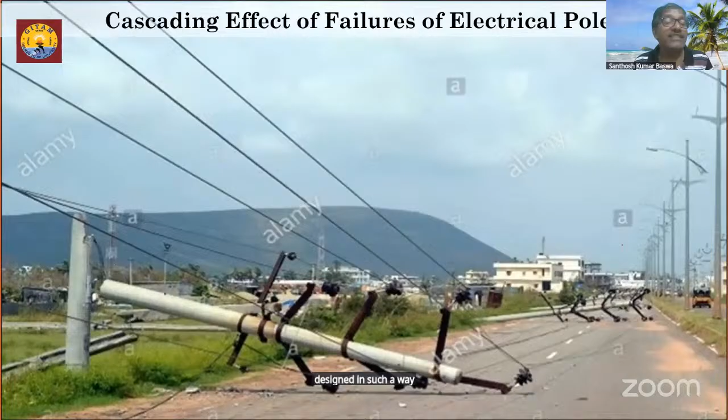In case of tall buildings, there are two types of design: structural design, architectural design, and a third one, mechanical design. In structural design, we provide shear walls, or bundle structures, tube structures, outer tube structures, outrigger structures. Such structural elements are constructed for the building as considered by the structural engineer.

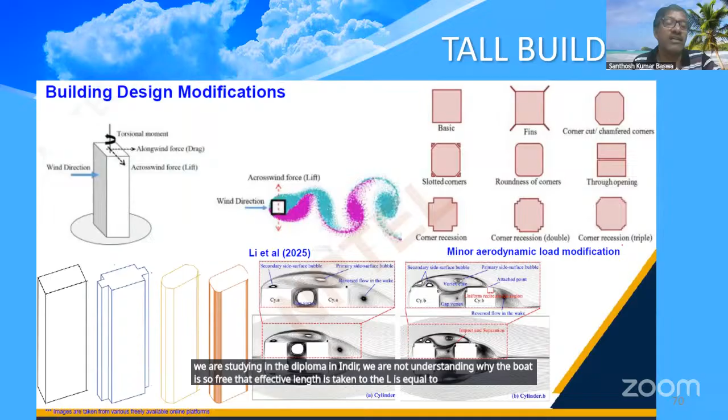That is the rigid body—the column or both ends are free. That is the rigid body moving into the stream of air. That is the three types of dynamics.

So in this case, building aerodynamics is the air, wind and body interaction. This type of interaction we consider. This is the plan variations—these are the architectural variations we consider for reducing the wind force.

That is in case of small flow induced vibrations, we have to provide some weight to reduce the wind induced vibrations. We have to provide some methodology to reduce wind oscillations so that the rigidity of the structures is ascertained, because of three examples: one is the long structure, second is the wind turbine.

Third one is the horizontal pipeline. These are the structures—how the forces, the magnitude, time lag in case of velocity, density, external flow regime or turbulence, this is the natural frequency, how the variations of masses and damping. These are the considerations for flow induced vibration and mitigations also.

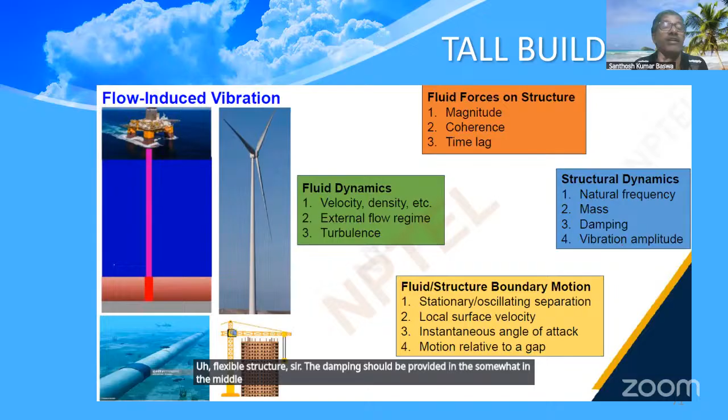But in case of long flexible structures, the damping should be provided somewhat in the middle type. We have to provide some weights so that the oscillations are reduced. This is the top of the structure where we provide some weight so the oscillations are reduced. This is the Tacoma bridge, due to the alternate vortex.

Alternative vortex means left side and right side—this is the right side, this is the left side. These variations cause continuous variations, causing damage to the structures. These are considered as occurring continuously, and it reaches the natural frequency of the structure. When it reached the natural frequency, the structure collapsed because resonance was taken into consideration.

So flow separation—in this case we reduce the aerodynamic forces by providing extra momentum to the fluid, that is provided as weight or delaying the shear layers in the base area, considered in some slots or in the plan area, or in the sectional area. We have to provide some porous structures so that we reduce the flow, the stagnation pressure on the structure, so we are safe against wind.

There are two types of controls: passive control and active control. The passive control means geometric modification—we provide plan geometric modification, or elevation modification, or other types of porous structures. We have to provide so much architectural variation based on wind tunnel test and wind tunnel procedure.

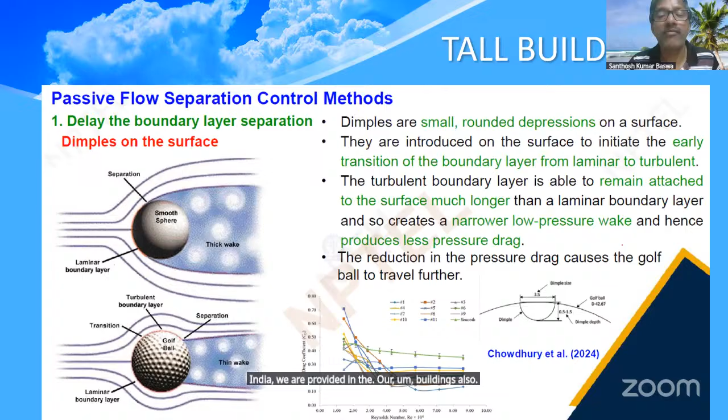So these are the dimples. How the dimple, or otherwise the curve or the aerofoil shape, allows the force of air to pass freely without suction effect or without damage - in case of suction, it is the pitting effect.

In the same pitting effect, even in hydraulics, we provide a larger area to reduce the vacuum pressure to positive pressure, increasing the pressure to reduce the velocity, to avoid the pitting effect.

Same situation applies to aerofoils and our buildings - in case of suction effect, our building was damaged. To avoid the suction effect, we have to provide such geometry so that the suction is reduced. So these are the type of vortex generated.

In case of vortex, when wind flows from one direction to another, not in free flow, some dent marks or rectangular or parabolic dent marks have been provided so that the wind is not in free flow and no suction happens. Some incident wind is interrupted by blades or vanes, some triangular or rectangular fins, so that suction does not happen, and at the same time wind flows freely, reducing aerodynamic effects.

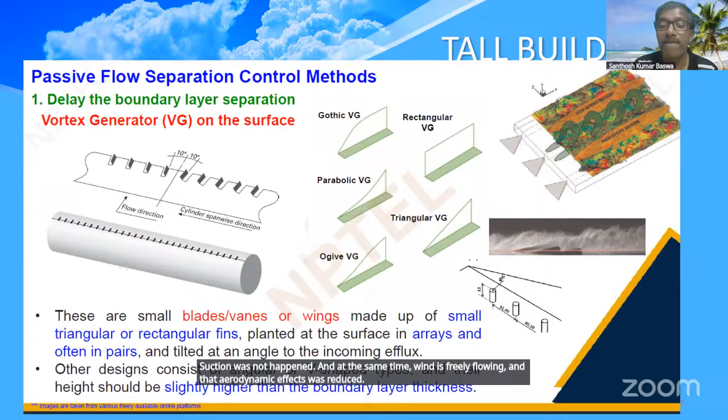Same vortex generation - vortex means a free vortex, which is rounded. It can be a free vortex or a forced vortex, depending on the variations of wind flow around the building.

In case of a long smooth building, smooth wire, or smooth column, this gives rise to wake and downstream sections.

When wind velocity variation with respect to time is reduced, the wind shows highest variation causing the effect. When wind flow around the body is increased, the effect is normally reduced. So such geometric modifications are provided to reduce wind forces on structures - this is building aerodynamics.

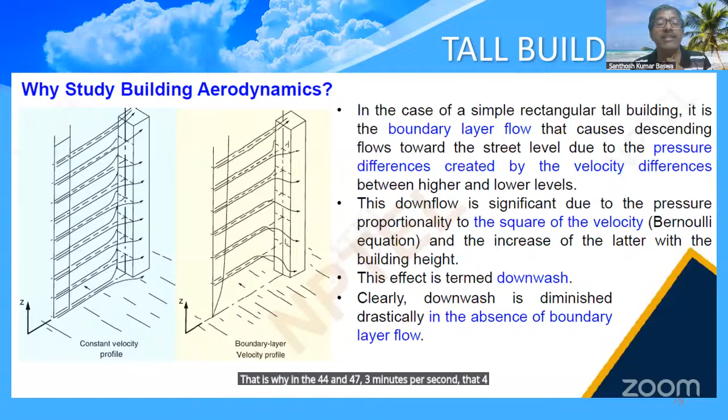So we must take utmost care in considering any building, even for small variations. That is why at 44 and 47 meters per second, the 47 shows the highest variation compared to 44.

That is X, Y, Z - three movements and three forces are considered: pitching, yawing, thrust, drag, lift, rolling - all directions, all variations of movements and forces are considered while designing the building.

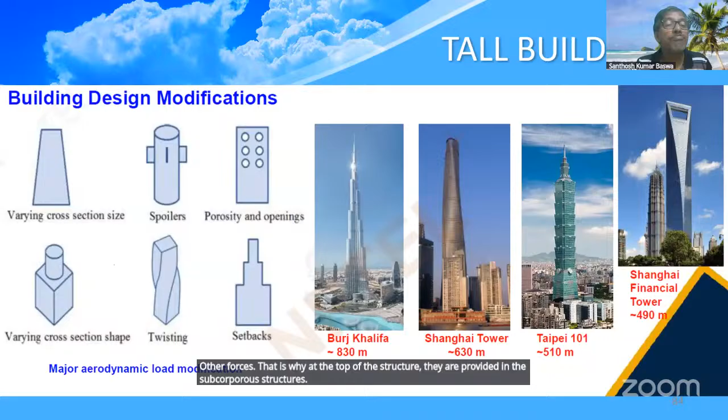At the top of the building there are some points provided - these are porous buildings or porous portions where variation of wind is considered greater than other forces. That is why at the top of the structure, porous structures are provided. This shows the basic cross-sectional variations - tapering, setbacks, or openings provided.

In case of tall buildings, consider the foundation design and foundation variations - what is 75 meters by 75 meters, and how the outrigger design or bundle structures or other structures are provided as the basic foundation design for these structures.

So this is the spire, which we have already discussed. See, this is the pyramidal structure. This is the 120 degrees of plan area. That is where there is a pyramid provided for construction. This is the Burj Khalifa of 830 meters. It is 41 to 50 meters in width, one side is 50 meters, so the center is 17 meters.

This type of structure was considered for wind load, and not only wind load, but also for earthquake load. But in this lecture we are considering wind loads only. On the left side is some facade we are providing in the porous structures.

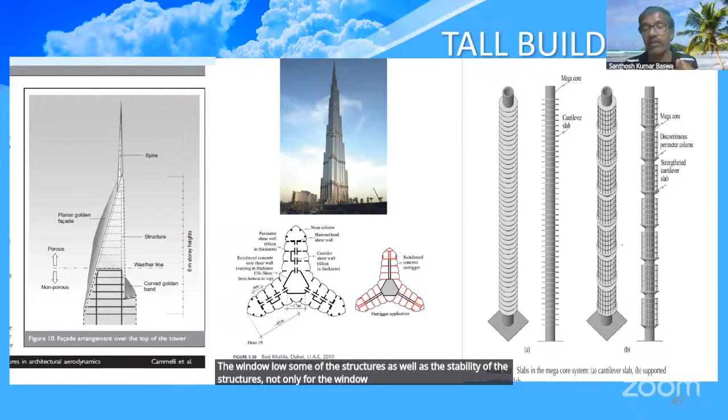So this shows the variations from the Petronas Towers in Malaysia to the Burj Khalifa towers, variations in height from 830 meters to 300 meters. This shows how various architectural variations in cross-sectional area and elevation were considered for reducing wind forces.

These are based on wind studies in wind tunnel studies. Wind tunnel studies have been provided in SERC and RWDI, some IIT Roorkee, and IIT Hyderabad recently have provided wind tunnel testing also for drone studies. This shows how buildings are made porous and given architectural frames to reduce wind forces, as we've shown in the diagrams. It shows more impact than the theory, which is why we provide so many diagrams and collections, showing how different designs were modified in actual real-life constructions around the world.

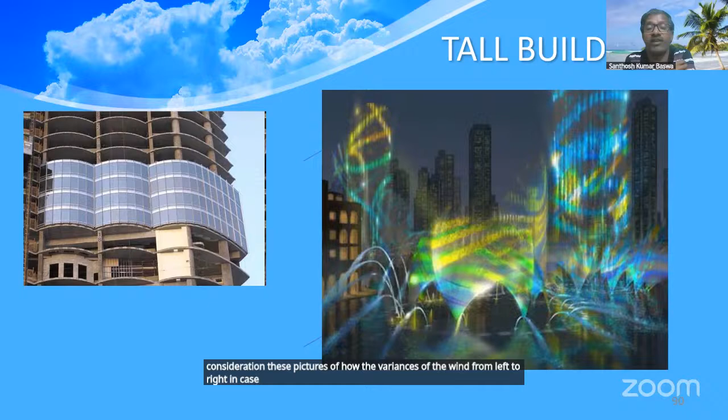So this is also somewhat like Burj Khalifa and other structures. This is the plan area, this is the wind action. This shows the plan view with slots and without slots, how attachment and reattachment were done in both structures, up to some type of structures. This is the solid structure, and above that, the porous structure provides wind flow from the middle of the structure, so the wind flows freely from the south side, reducing wind impact while increasing height. That is the consideration for the stability of the structure.

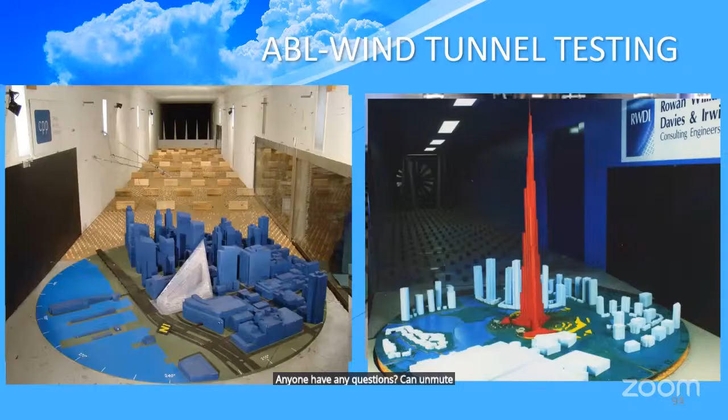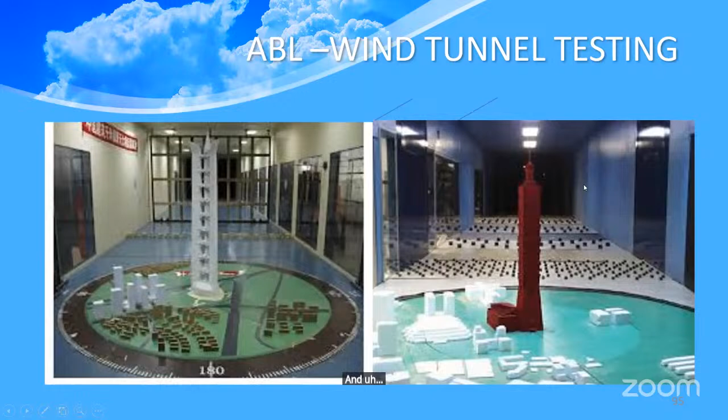Sir, good evening, Santosh garu. The session is very informative and the subject is very dynamic, sir. Thank you, sir. Yes, the subject is dynamic in nature. Thank you very much, sir. Thank you, sir. Participants can unmute or post questions in the chat box.

Sir, there is one question. What is the height of the structure above which wind load must be considered without fail?

The minimum wind loads have been provided for consideration of structural stability up to 10 meters. Before and up to 10 meters, there is no mandatory consideration of wind load. Beyond 10 meters, we must mandatorily consider wind loads, even for rigid structures. This is stipulated in the code.